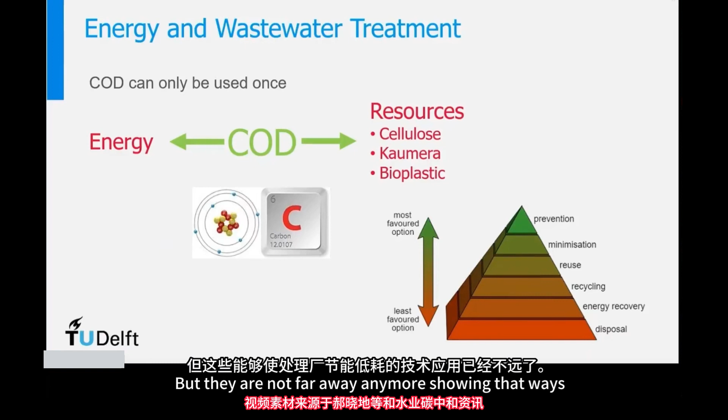And in the Netherlands, we are looking to and have been involved in 3 recovery options, which are now all 3 quite close to practice, at the brink of becoming fully commercial. They're not 100% commercial, but they are not far away anymore, showing that wastewater treatment plants can become energy efficient.

Now, if you would do resource recovery, it's often said that resource recovery, organic carbon recovery, is competing with energy production. Well, that's not the case. We are not there yet that we can convert all the organic carbon into valuable resources. Unfortunately, until now, it's effectively a relatively small amount.

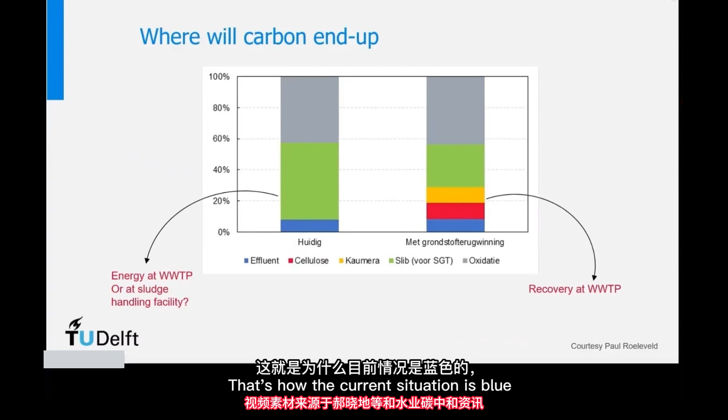On the left-hand bar, sorry for the Dutch on the graph, that's how the current situation is. Blue is the amount of organic carbon in the influent which ends up in the effluent. Green is the organic carbon in the influent ending up in the sludge. And gray is the organic carbon in the influent which is oxidized into CO2.

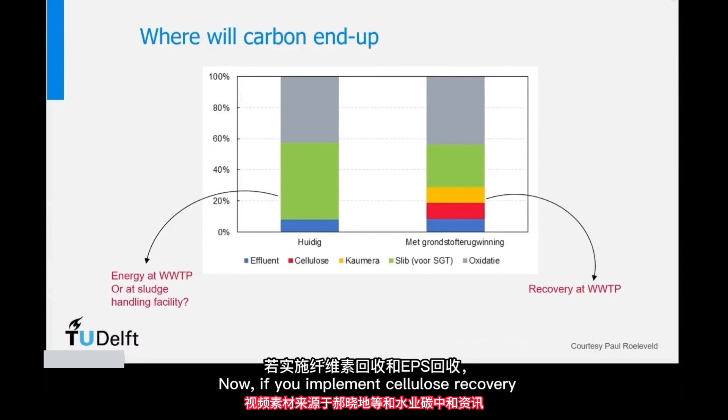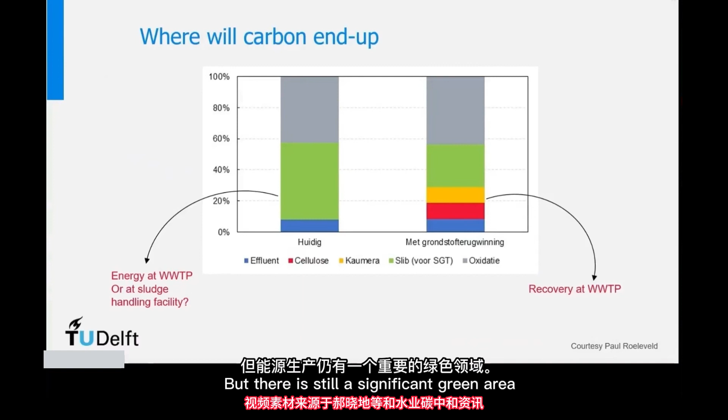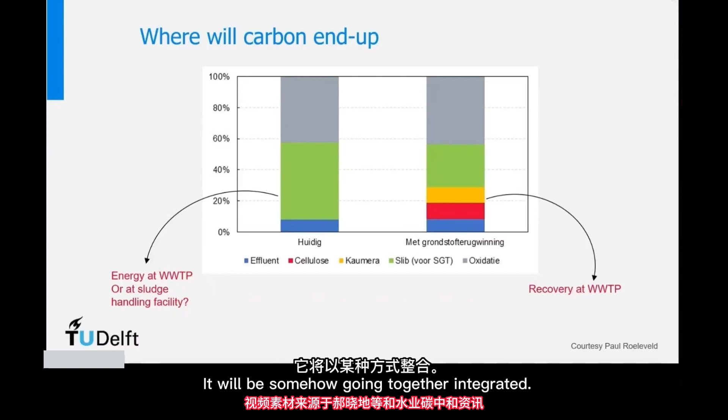Now, if you implement cellulose recovery and recovery of EPS, the picture changes a bit, but there's still a significant green area for energy production. So there is an impact, but it's not completely that one excludes the other. It will be somehow going together, integrated. And maybe one might benefit from the other. I will come back to that in a minute.

I just want to introduce you these resource recovery options, because I think from a carbon neutrality point of view, these options are way better than, for instance, going to anaerobic digestion. Cellulose: if you throw toilet paper in the toilet and you flush it away, in the Netherlands roughly this is 10 kilograms per person per year of cellulose, which can be recovered. So that's a huge amount. I have no idea on toilet paper consumption in China. I know in the US it's 1.5 to 2 times more than in the Netherlands.

You can very efficiently get it out with a simple sieve. The technology is there. It can be recovered. On these plants in the Netherlands, which are indicated on the country map, the cellulose is recovered. Advantage: at 10 degrees Celsius, the winter temperature in the Netherlands, cellulose is not degraded, just ends up in the sludge, and it contributes to the sludge production. So you minimize sludge production, certainly in the winter, and a bit less in summer.

At 30 degrees, cellulose is usually completely degraded. So it's very temperature dependent how efficient it is. But it's a lot less sludge production, which easily pays for the cost of sieving out the cellulose. There's a company called Recell now in the Netherlands. They collect this cellulose and they develop a market for the recovered cellulose.

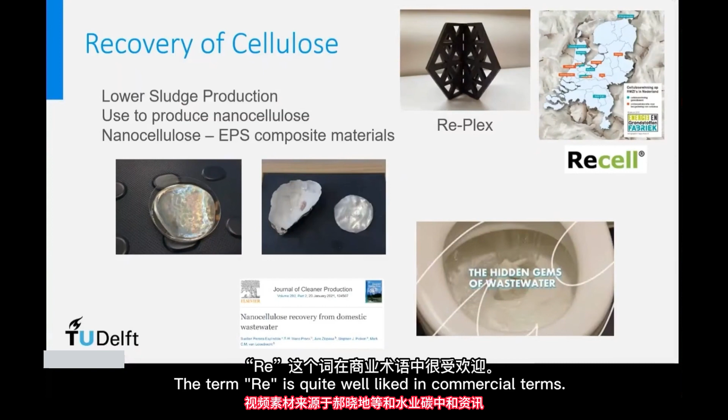If you mix it just with cellulose, just the raw fibers you get out of the wastewater, also then you can make a nice composite material, on the top left side. And that is a composite material of cellulose and microbial EPS, which you can 3D print, which you can mold into all kinds of structures. And we're trying to develop that together with a composite company under the name Re-Plex. You see the term re is quite well liked in commercial terms.

Another product we're looking at is producing PHA from wastewater. Now, if you look, PHA, polyhydroxyalkanoate, is a compound which is almost the same as polyethylene and polypropylene. You can more or less make the same materials from that as what you make from polyethylene and polypropylene. And here you can see, this is a bit to show the commercial value.

If you have 3 kilograms of organic carbon and you convert it into biogas, in Europe and US, you will get maybe 10 to 20 cents on the market. And in the Netherlands, you get 60 cents because the government wants you to produce biogas and puts a lot of subsidy on it. But for how long they do that, that's a bit uncertain.

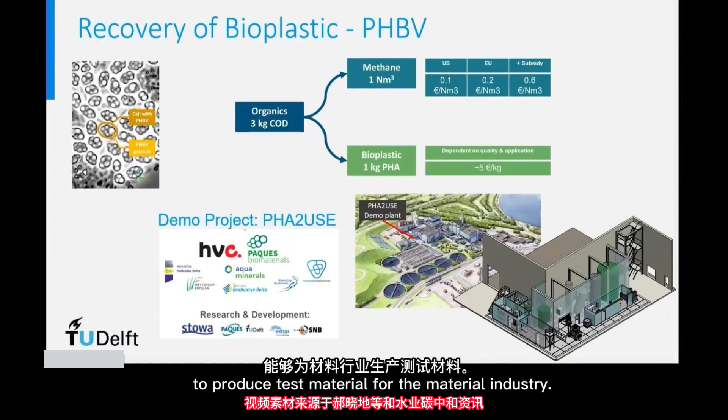If you convert that 3 kilograms of COD in bioplastics, you make 1 kilogram of bioplastics. That has a market value of roughly €5 per kilogram. So in economic perspective, much more valuable, but we still have to develop that technology. And the stage of the technology is at a demonstration plant in the Netherlands, at the sludge handling facility. And this plant can produce roughly 50 kilograms of bioplastic per day. So it's a nice plant to produce test material for the material industry.

The last one is the extracellular polymers from granular sludge. Extracellular polymers have long not been studied from wastewater, but we started to study that. You can extract them pretty much in the way you can extract alginate from seaweed. The interesting part is you can produce per person roughly 10 kilograms of this polymer per year from the wastewater.

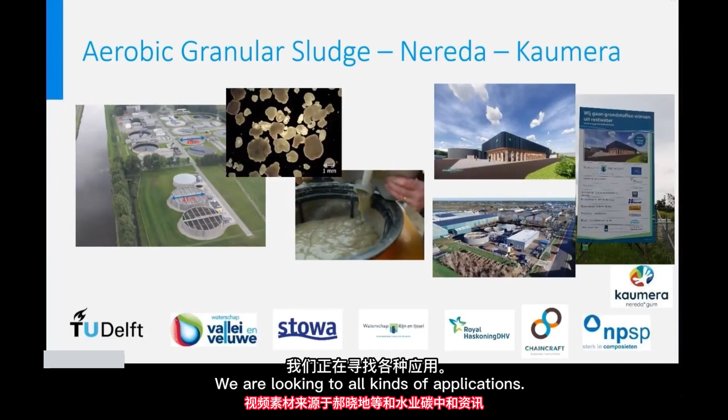So it is an interesting application, and we're looking to all kinds of applications, partly this composite material, partly it's non-flammable, so we look to application non-flammability. Currently, the first applications is in agriculture for all kinds of reasons, but mainly for binder in coatings and pelletization in agriculture, and partly because it has root forming stimulation, so the germination of seed goes better.

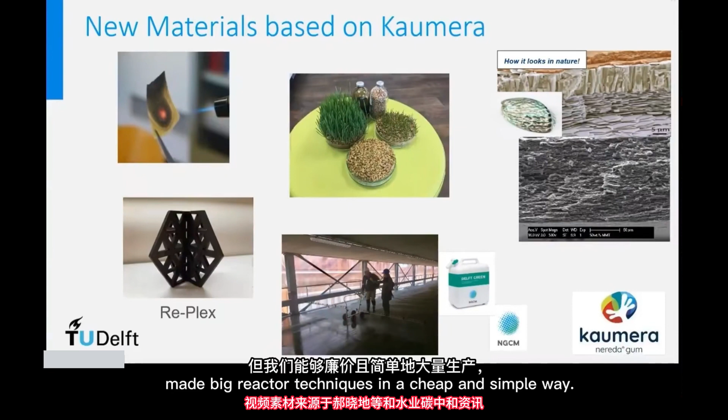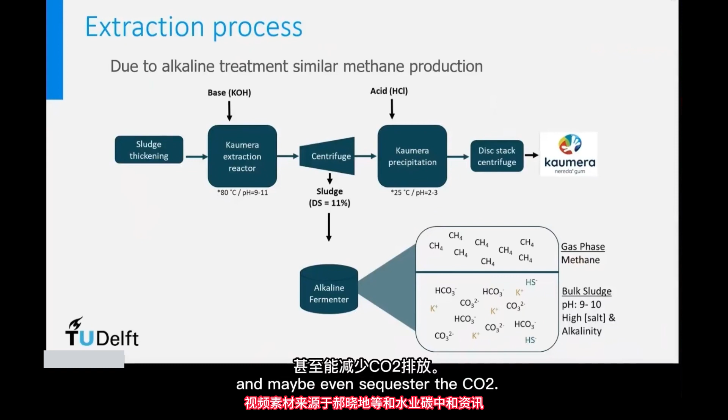So to finalize, we are looking to now integrate this fully, that we can extract the polymers, we can also recover the phosphate as needed, but the polymer extraction is done at pH 9 to 10, which means that the remaining sludge after the polymer extraction, all that remaining organic carbon is at pH 9 or 10. If we do the digestion there, then all the carbonate stays in the liquid and the gas will contain only methane gas. It is possible to do the sludge digestion at that pH, and then directly produce green gas and maybe even sequester the CO2, but that's a much longer way to go. And in this way, we then integrate the biogas production.

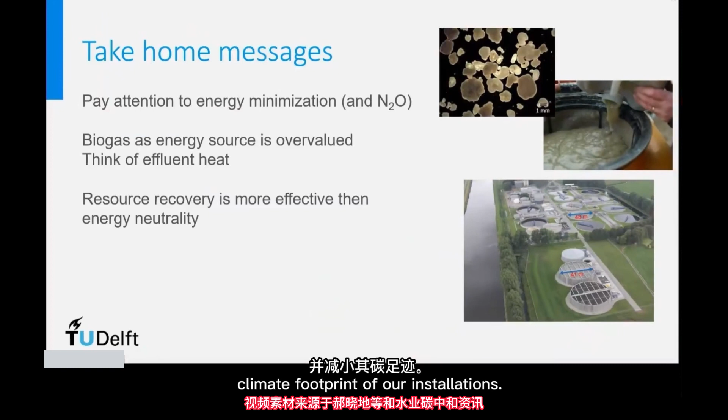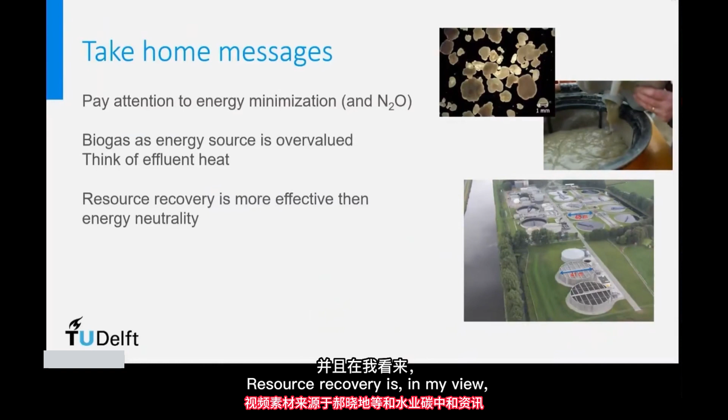So as take-home messages, pay attention to energy minimization, and we should understand better how this N2O emission is if we want to take it serious, that we want to minimize climate footprint of our installations. In my view, biogas as energy source is a bit overvalued. It is useful. I don't say you should not do it, but be aware and think of using effluent heat integrated better with the city or the villages where you have the treatment plant. And resource recovery is, in my view, a much better way to go in the end than energy neutrality.